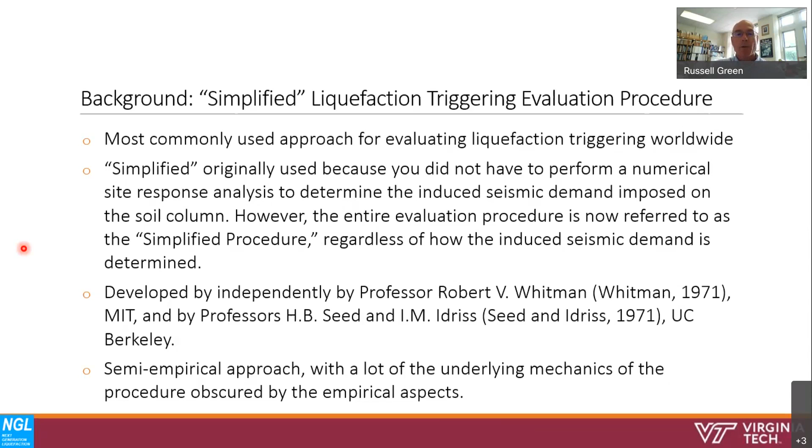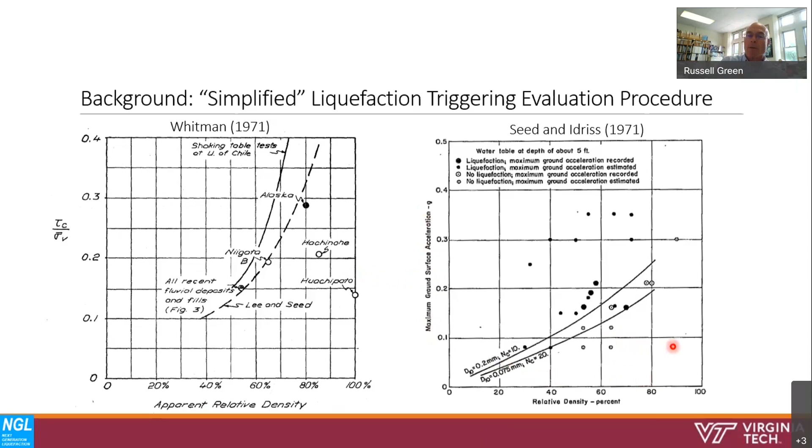All right, so back to the definition of simplified.

As opposed to performing numerical site response analyses, the estimated cyclic shear stress at depth in a profile was determined using Newton's second law, F equals ma. They assumed a rigid soil column, you knew the peak ground acceleration at the ground surface, and you were interested in computing the maximum shear stress at some depth z. Starting with Newton's second law and going through substitutions, you end up with the maximum shear stress at the base of this rigid column being equal to the total stress divided by the acceleration due to gravity times the peak horizontal ground acceleration at the ground surface.

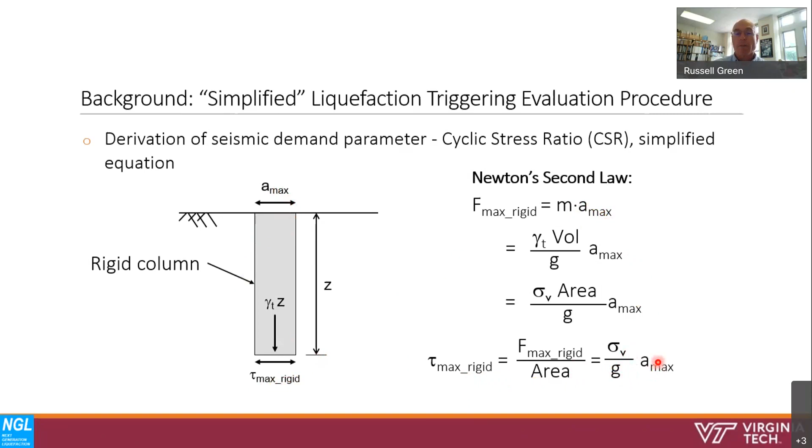The rigid soil column doesn't represent what we have in the field, so there needed to be a series of corrections and normalizations, and many of these evolved over time.

The resulting equation we use for our normalized cyclic stress ratio, designated as CSR star, is 0.65 times A max divided by G, times total stress divided by initial vertical effective stress, times R sub D, times 1 over the magnitude scaling factor, times K sigma, times K alpha.

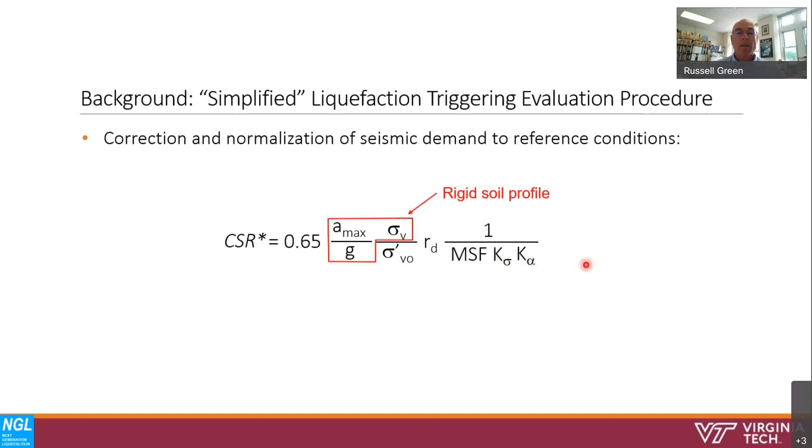If we go through specifically what these normalizations are, you can see the components for the rigid soil profile bound in red. Then the normalization for the fact that we don't have a rigid profile but a non-rigid profile introduced R sub D. We're doing this for a reference condition of a magnitude 7.5 event, which includes two components, the 0.65 and the magnitude scaling factor. You could argue the 0.65 doesn't deal with duration but with amplitude, but inherently they're linked, so I'll lump those together and say both were used to represent duration.

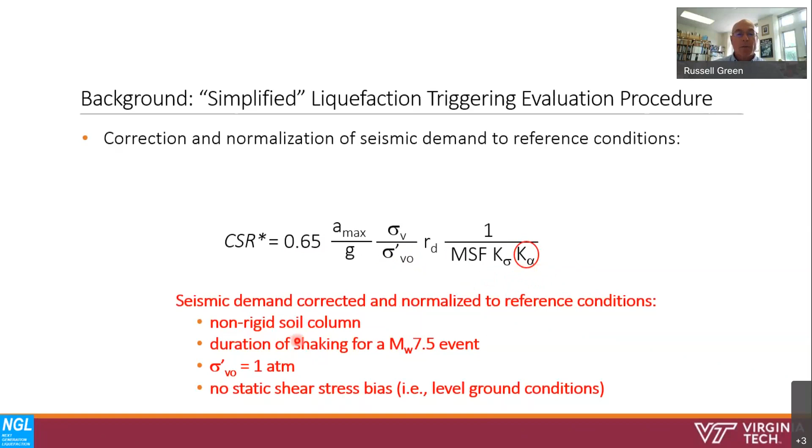Then we have dividing by the initial vertical effective stress and the introduction of K sigma to get it to 1 atmosphere overburden stress. And finally, no static shear stress or level ground conditions, the introduction of K alpha. So all of these conditions represent our reference conditions.

This cyclic resistance ratio curve, or normalized cyclic resistance ratio curve, corresponds to the reference conditions that we normalized our cyclic stress ratio to.

In a forward analysis, we compute the factor of safety against liquefaction with the traditional definition of factor of safety being capacity divided by demand, which for liquefaction is CRR star divided by CSR star. Our CRR star is determined by performing in situ tests at the site of interest. Our CSR star is determined from our design earthquake.

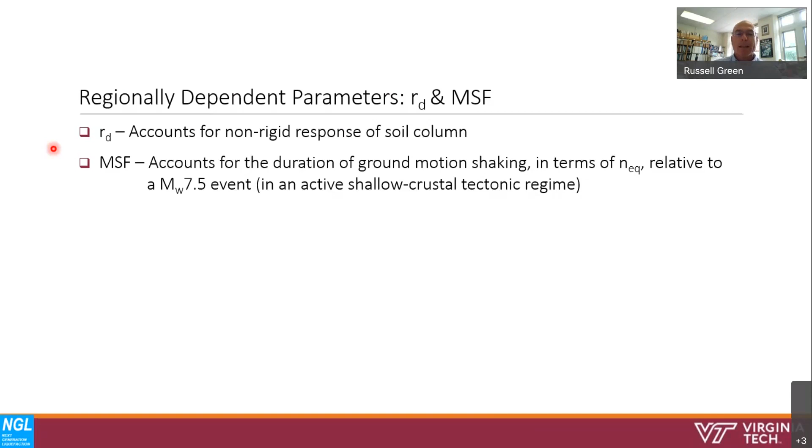This is relative to a magnitude 7.5 event, and again, in an active shallow crustal tectonic regime.

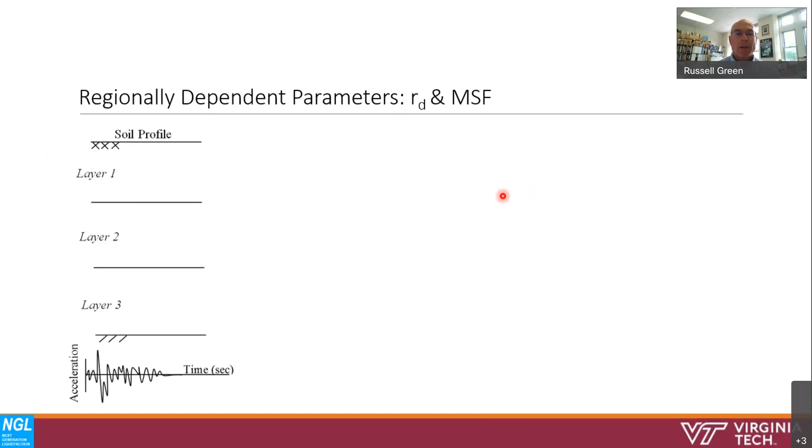So now looking at these parameters, R sub D and magnitude scaling factors, and how we develop those regionally, what we do is take soil profiles and ground motions, and select these for being representative of whatever region we're interested in. I'm doing these regions fairly crudely: Western US, Central Eastern US, Pacific Northwest for subduction zones, and then even within these different tectonic regimes, whether we're dealing with natural or induced seismicity.

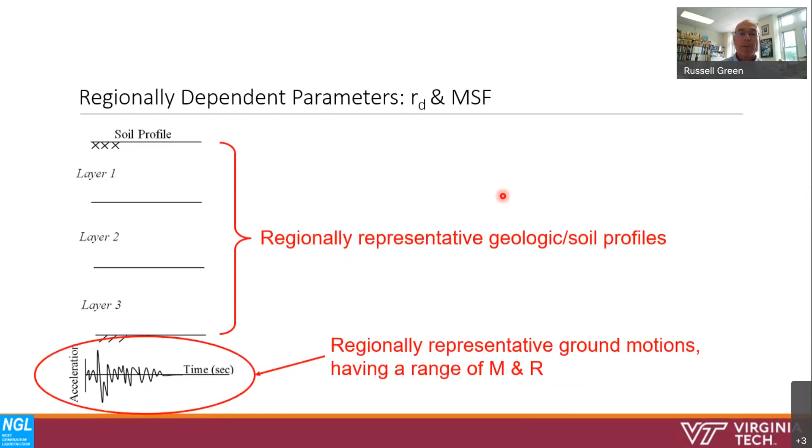Once we have our representative profiles and ground motions, we perform a series of site response analyses, and then we're able to get relationships for number of equivalent cycles, and also R sub D. These relationships are going to be region specific, and they're also going to be correlated if you're doing a probabilistic type analysis. So we'll have a distribution around each of these, but if you pick a low value here, it might mean you have to pick a high value there because they are correlated.

So back to what R sub D and magnitude scaling factor represent. When we're dealing with a region, it's going to be a function of the properties of the soil profile. Our profile stratigraphy is going to be a function of shear wave velocity and impedance contrast. The predictive parameters we've commonly used are VS12, our average shear wave velocity in the upper 12 meters of the profile. This was originally proposed by Cetin, and we've done subsequent analyses, and it actually works well in most of the regions we've looked at. There's also going to be regional dependencies.

We also have the stress strain response of the individual strata. I'm not sure if that's regional—probably geomorphology would be a more proper way of saying it's dependent, but potentially regionally dependent on a broader scale. Also depth of bedrock and the bedrock stiffness.

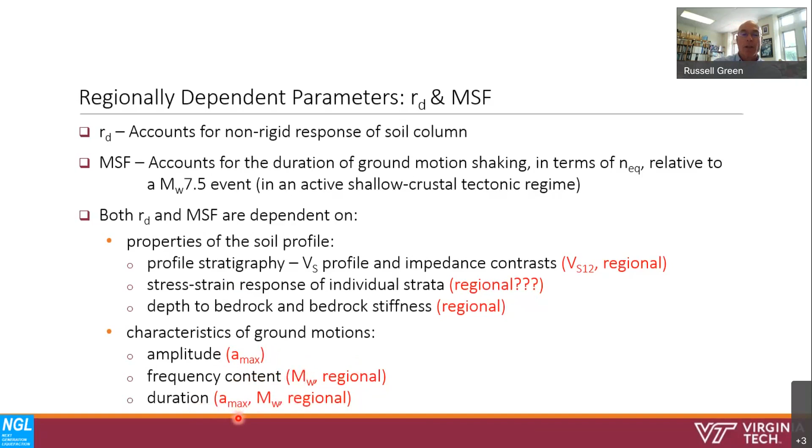And then the characteristics of the ground motions: the amplitude of the ground motions, which we typically represent by A max, our peak ground acceleration in the horizontal direction at the ground surface. Our frequency content, which we typically represent in terms of magnitude, but also regionally. And then duration, with peak ground acceleration, magnitude, and region. I'll specifically point out this peak ground acceleration because this hasn't traditionally been included as a duration predictive measure.

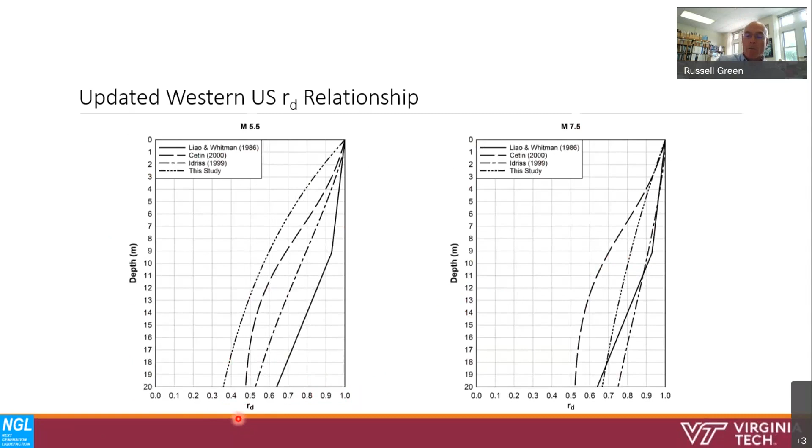So looking at updated R sub D relationships for the Western US, and the Western US is going to be our reference condition. When I refer to the Western US, I'm referring to an active shallow crustal tectonic regime.

So I have two plots. One on the left has depth on the vertical axis and R sub D on the horizontal axis, and this corresponds to a magnitude 5.5, and I'm showing 4 different curves. Three of the curves that fall to the right are ones that have been previously used, and the one we developed is the one that falls most to the left.

Then a similar plot, only now for a magnitude 7.5, and you can see these curves kind of bunch together a little bit closer. So you can see for lower magnitudes is where we would get a bigger discrepancy using existing R sub D relationships versus the newly proposed one.

Number of equivalent cycles is used to represent the duration. We performed a series of numerical site response analyses, computed the duration for different ground motions at different depths, and then looked at different predictive measures or parameters to quantify this number of equivalent cycles. We ended up finding out that it's related to Amax, the peak ground acceleration at the ground surface, and also the magnitude.

The introduction of Amax, I actually resisted for a while, and in retrospect I shouldn't have. The reason is if you think of near field motions, particularly considering directivity. If we have a given magnitude event and a given site to source distance, let's define site to source distance as distance to the fault.

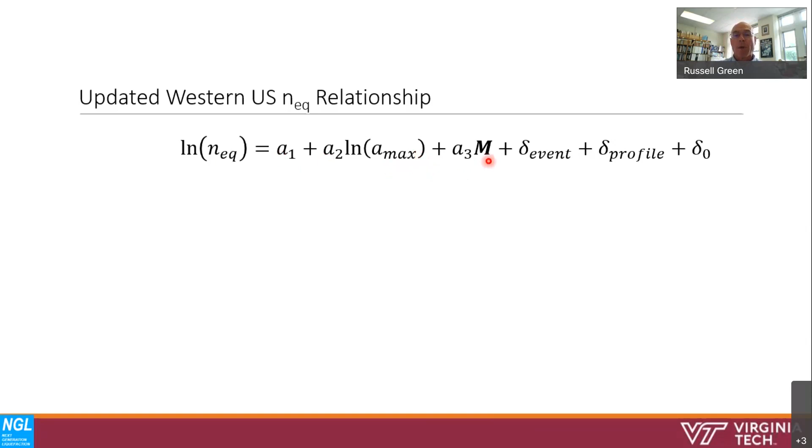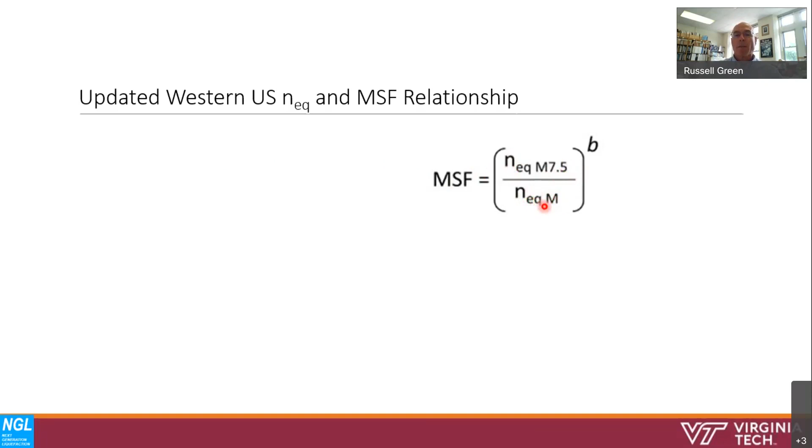The way we relate this to magnitude scaling factor is we have number of equivalent cycles for our reference condition, which is a 7.5 event in the Western US. The denominator is number of equivalent cycles for a given magnitude, which could be regionally dependent. This is raised to a power of B.

The B value is typically taken from laboratory tests. What we do is plot the stress ratio on a log scale versus number of cycles to liquefaction. This often plots as a straight line, and B is the negative slope of that line.

But in looking at that, we ended up finding out, and this was Kristen's work, that the B value can actually vary depending on how you define liquefaction. For loose samples, we typically use an excess pore water pressure ratio of 1. For denser samples, that doesn't hold, so we end up using some sort of strain criteria. Depending on what strain criteria you use can influence the B value, particularly when dealing with a low number of cycles to liquefy.

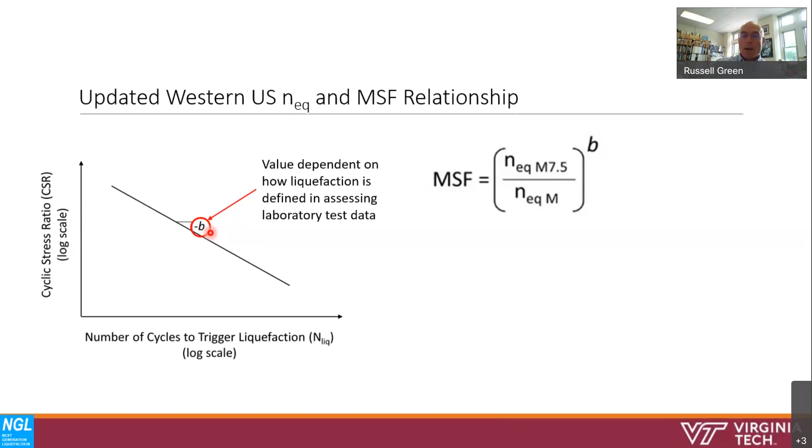We end up finding out a better way of doing this is plotting cyclic stress ratio versus number of cycles to liquefaction, but doing a contour of constant dissipated energy. This is consistent because the way we compute number of equivalent cycles uses fatigue theory, which is actually based on dissipated energy, whether it's embedded in it or upfront, depending on how you implement it. Using a contour of constant dissipated energy, we find that this B value is fairly constant at around 0.28.

Another thing is that it allows you to determine this contour and the slope for modulus reduction curves that are typically used in equivalent linear site response analyses. The benefit is those modulus reduction curves are often based on a large statistical analysis of a large database of different types of soils.

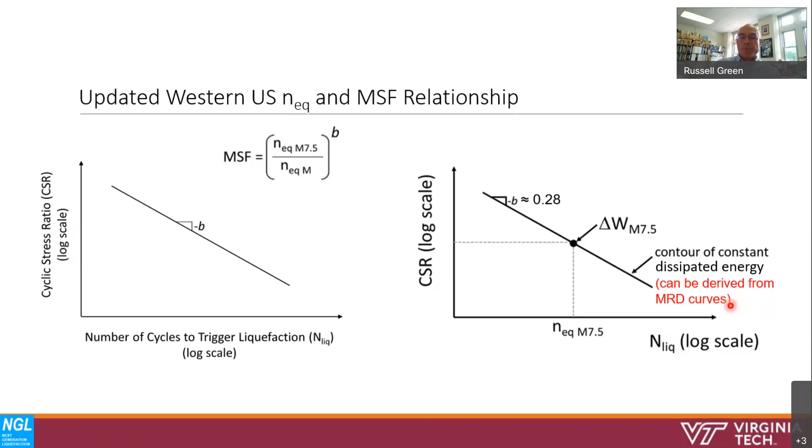Now going into the magnitude scaling factor, for a magnitude 7.5 event, that's only one of our predictive variables. We also have to have a reference condition for Amax. So what I did is look at the case history databases for liquefaction and no liquefaction cases ranging between magnitude 7.4 and 7.6, and averaged out the PGA, ending up with a PGA of 0.35 G. So our reference condition for that CRR curve is a magnitude 7.5 event with a PGA of 0.35 G, in an active shallow crustal tectonic regime.

Our denominator in this relationship is going to be a regionally dependent relationship, depending on what region your case histories are from.

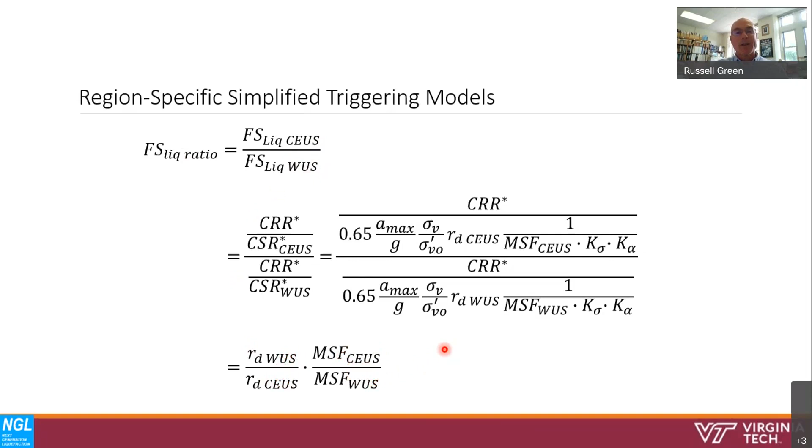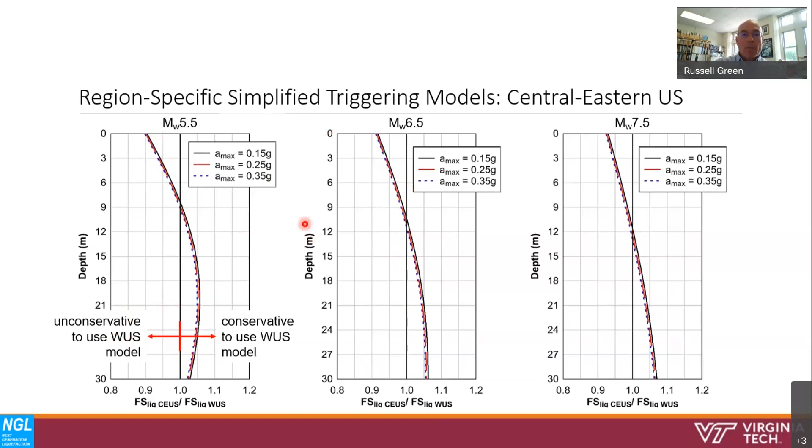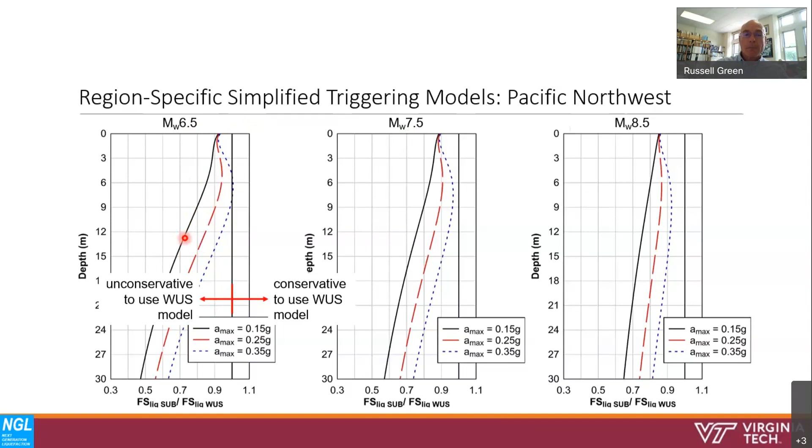And my slides are not advancing.

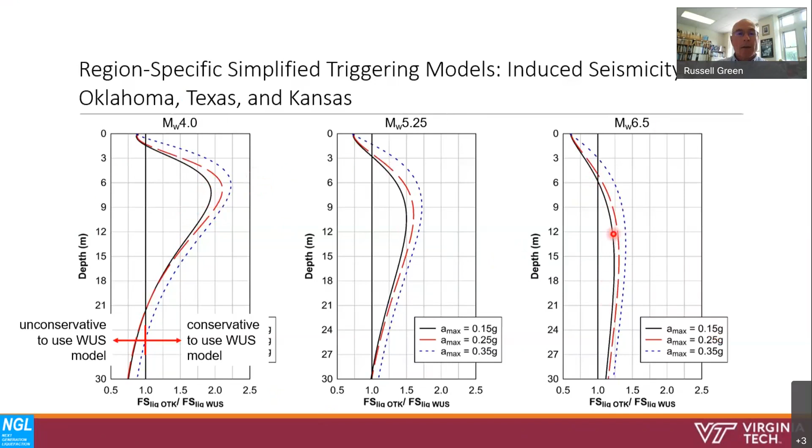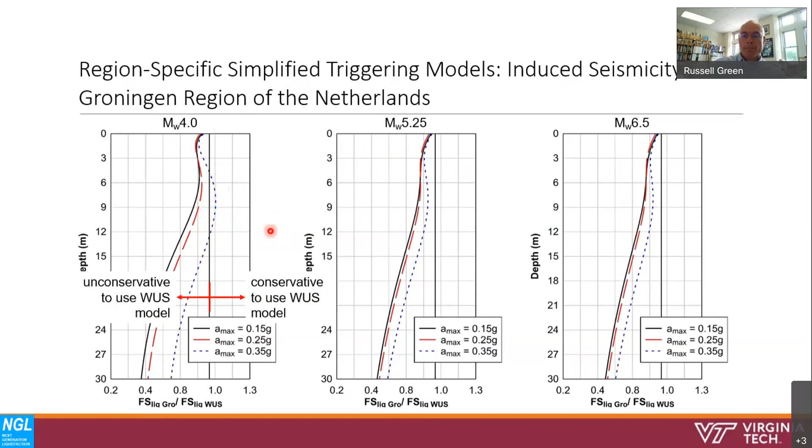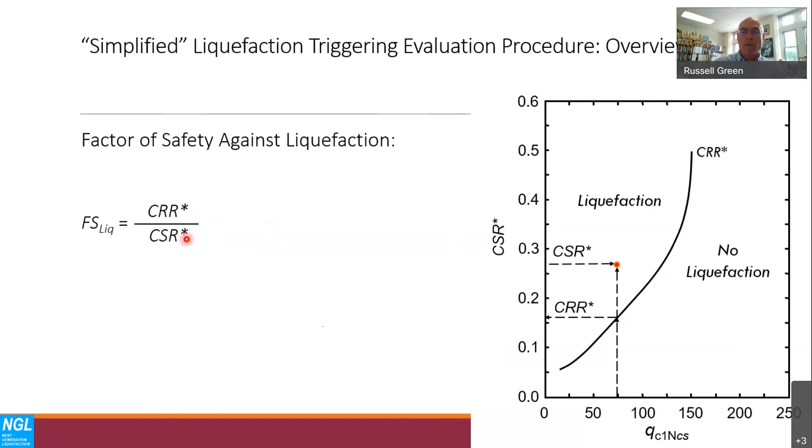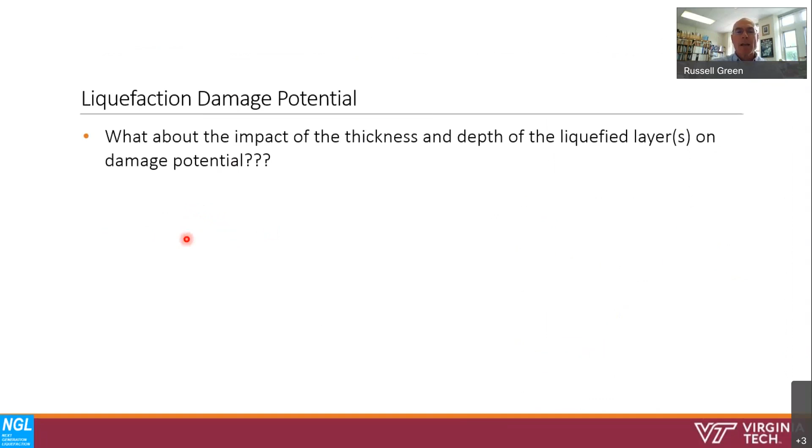All right, back to the simplified curve. Again, the factor of safety is the CRR divided by the CSR, where both are normalized for our reference conditions. The question then is, if we're interested in the damage potential for liquefaction, what is the impact of the thickness and depth of the liquefied layer on that damage potential? So it's not just about getting a factor of safety and determining whether a site needs remediation based solely on that, but trying to predict what the actual damage potential will be.

The liquefaction potential index was developed by Iwasaki et al. in 1978, and I'm going to categorize this as a manifestation severity index model. What Iwasaki proposed is that you perform your in situ test, use the simplified triggering curve to compute your factor of safety, then take a weighted average of the factor of safety and integrate it over depth, to a maximum depth of 20 meters, and come up with an index value, in this case your LPI value, which you then correlate to the expected damage.

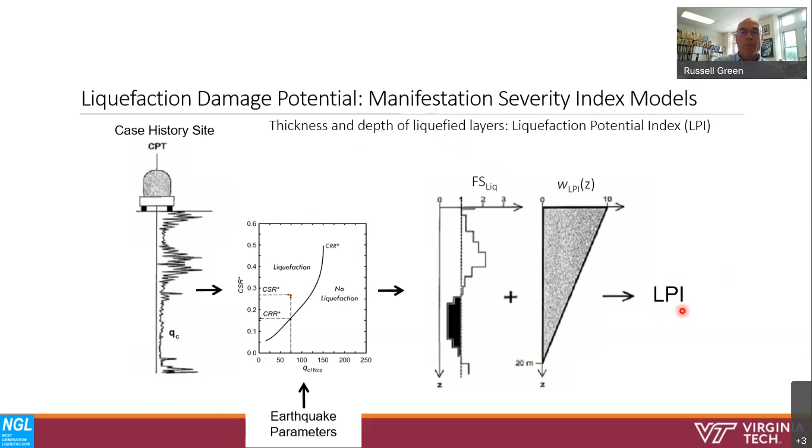Mathematically, that is shown here. You have the LPI, which you're integrating over your depth of 0 to 20 meters. You have your depth weighting factor, and then you also have your weighting factor based on the factor of safety. The limits for this are: an LPI of 0 would be the lowest value, and the maximum value you could get is an LPI of 100.

Based on some case histories from Japan, Iwasaki et al. found that if LPI is less than 5, severe liquefaction manifestations are not expected. And if LPI is greater than 15, severe manifestations are expected.

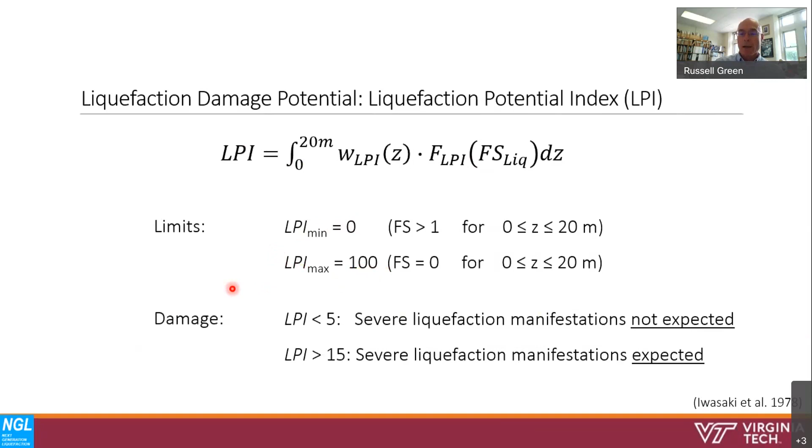The question is, although what we do now takes into account the factor of safety, the thickness, and the depth of these layers, there are other influencing factors on the damage potential, specifically the influence of the non-liquefied crust, and also the dilative tendencies of the soil at moderate to larger strains.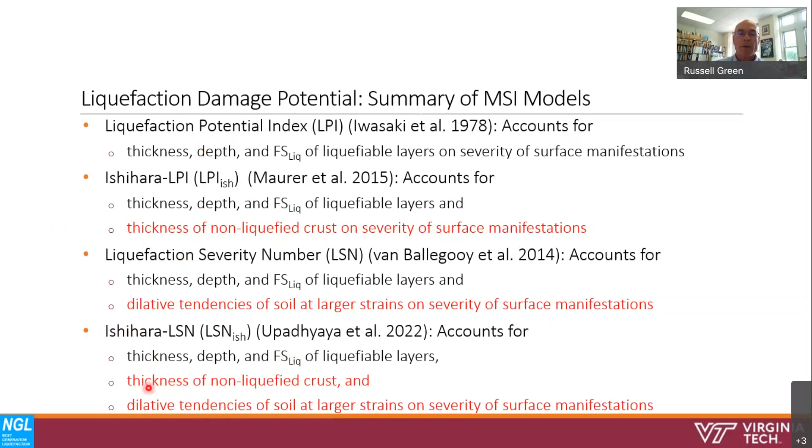We're not going to have any interbedded non-liquefied layers in these profiles. Most of those, which is also of interest and have been studied, fall in western Christchurch. So in total, what we had was just over 7,000 case histories. We also excluded any case histories where lateral spreading was a predominant manifestation.

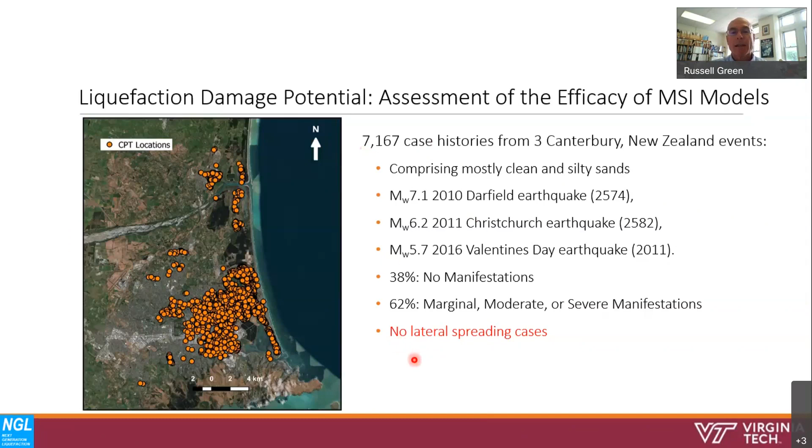So now what we did was use those four different manifestation indices models in this database and assessed how well they predicted severity of liquefaction. And what we ended up finding is that the two MSI models that account for the dilative tendencies of the soil ended up performing worse than the two models that didn't.

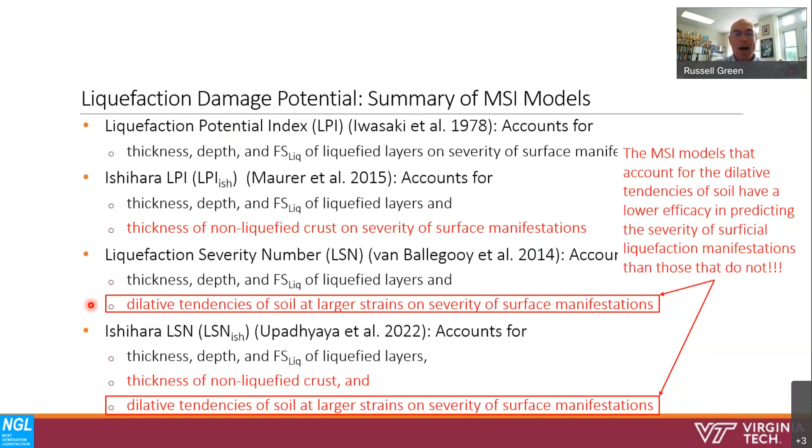So the original LPI model and the LPI-ish model performed better than the LSN and the LSN-ish model. It isn't that the LSN and LSN-ish performed badly, it's just that the LPI and LPI-ish performed better. The question becomes, why is that the case? Because we know that the dilative tendency of the soil directly influences the damage potential.

So now it's a matter of looking back and determining why we see the trends that we see. And what we end up figuring out is that we're double counting the influence of this dilative tendency at larger strains on the severity of surface manifestations. The reason for this relates back to how we developed our triggering curve.

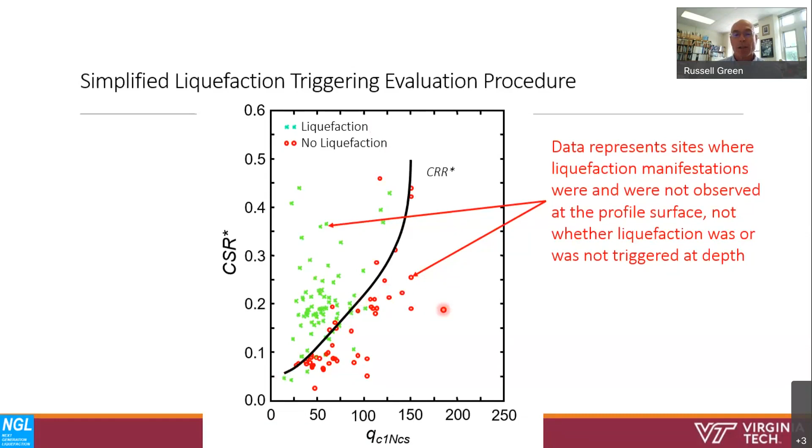So taking a curve that's now being influenced by this dilative tendency and then throwing on an MSI model that also takes in the dilative tendencies now double counts that dilative tendency behavior. So the motivation now is to try to separate triggering from manifestation, to properly ensure we can refine each component of this model for better prediction of damage potential from liquefaction.

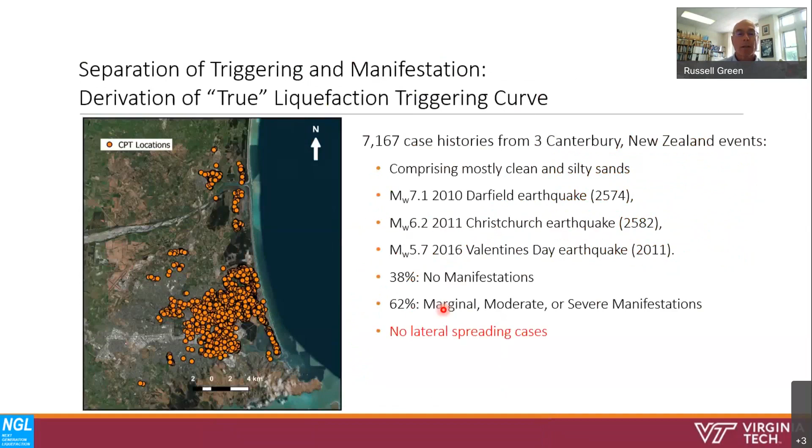So we went back to the same 7,000-some case histories, all from the Canterbury region of New Zealand, and we're trying now to separate the manifestation from triggering. We're defining this as the true triggering curve - not necessarily that it's 100% correct, but it's trying to remove the influence of the manifestation.

So all the sites we looked at were characterized by CPT. Now we need a triggering model, but again, what we want to do is use a true triggering model that's absent of any manifestation factors. So now we're just going to assume a shape for this triggering curve, then compute the factor of safety.

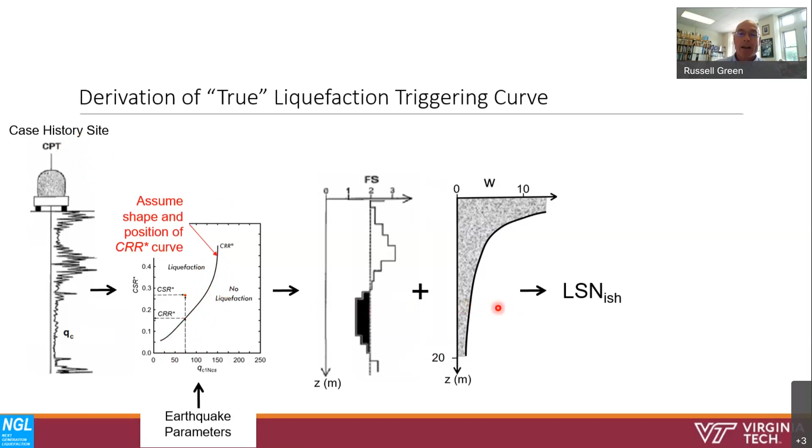We're going to apply the LSN framework because that accounts for the majority of the predominant manifestation factors we think influence manifestation. We'll do this for all 7,000 cases, comparing predicted to observed surface manifestations. Then we go back and revise the position of the curve, repeating this process multiple times until we get a triggering curve that gives our best predictions - the best comparison between predicted and observed severity of surface manifestations.

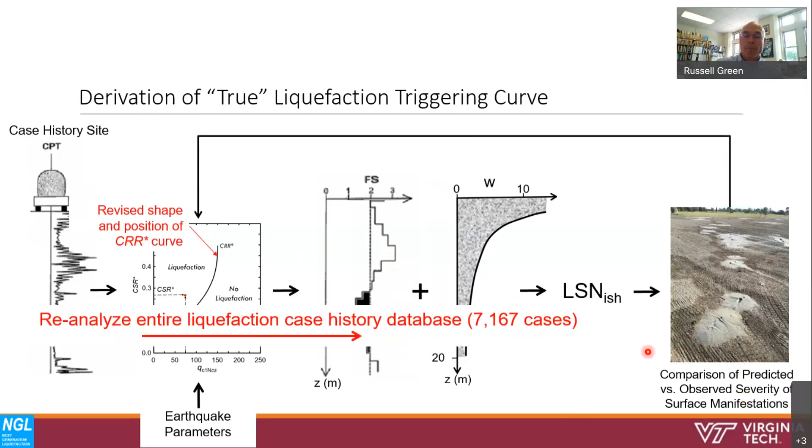So we did this, and this was our triggering curve. Now, the data - even though we had 7,000-some case histories to derive this curve - realize and compare that to the 13 originally used by Whitman and the 35 originally used by Seed and Idriss. So we have 7,000, but it's only from one region of the world and only from three earthquakes that impacted that one region. As a result, that data isn't able to fully constrain this true triggering curve.

And so we had to use some assumptions on the shape of it, but we ended up thinking that it's going to be a straight line, and we performed it probabilistically. So I'm showing the median probability of liquefaction of 85% and 15%.

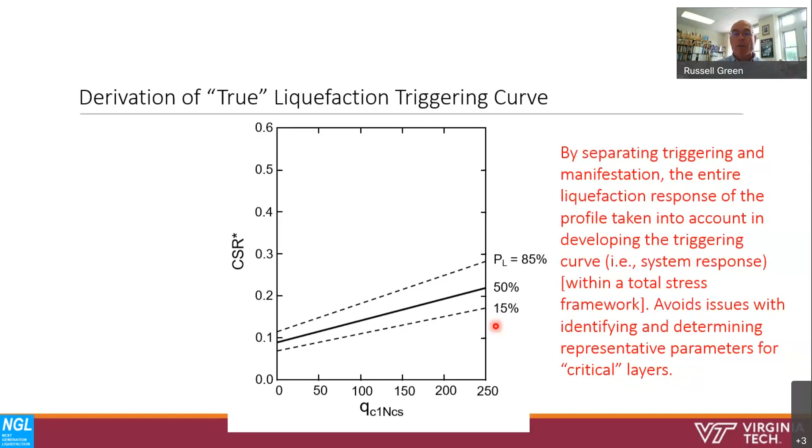The benefit of doing this—and there are multiple benefits—is we remove the subjectivity of figuring out what our critical layer is. For those who have developed triggering curves before, when you analyze case histories, you have to figure out what you think is the critical layer, including its thickness and representative properties. Because we're integrating through the manifestation model over the entire depth, or at least down to 20 meters, there is no single critical layer. Within a total stress framework, all the layers potentially influence the surface manifestations, so this avoids some of the subjectivity in selecting the critical layer.

So then we compared that to high quality direct cyclic simple shear tests—this was largely done by Kristen. I'm showing 4 points here, but that doesn't mean we only had 4 points. Each point is derived from a curve developed from at least 10 or so tests, where we plot cyclic stress ratio versus number of cycles to liquefy, and pull off the point corresponding to a magnitude 7.5 event, which we're saying is 15 cycles. So each of these points represents at least 10 tests.

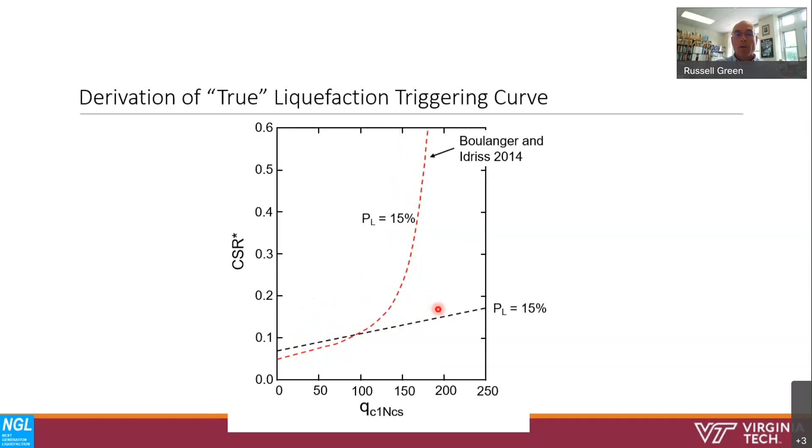If we now compare it to the Boulanger and Idriss 2014 curve, at lower penetration resistances there's not a big difference. It's not until we get into denser soils that we see the difference. That's exactly what we expected, because at denser soils you'd have a dilative tendency that could prevent manifestations from occurring. So comparing the deterministic or probabilistic curve to the probability of liquefaction at 15%, the difference—going from a linear line to a curved line—is because these dilative tendencies inhibit surface manifestations.

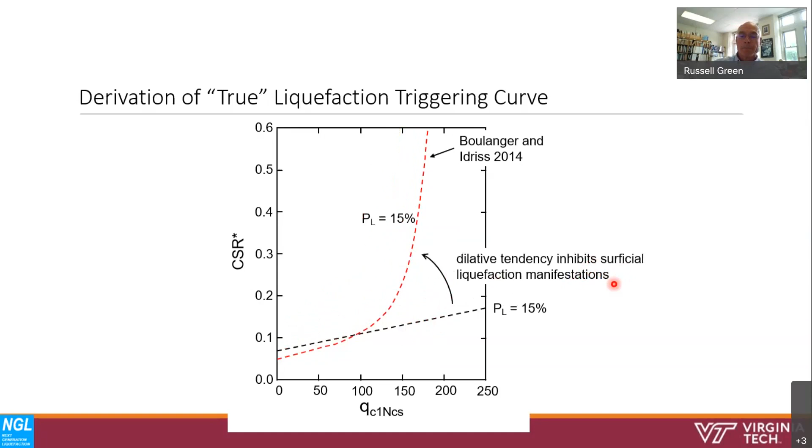Then, to put it into a full probabilistic or performance-based design, we're proposing a probability of surface manifestations given a certain LSN value versus LSN value. This allows you to use your deterministic curve, compute the factor of safety, run it through the LSN framework, compute your LSN, and this gives you the probability of surface manifestations for that LSN.

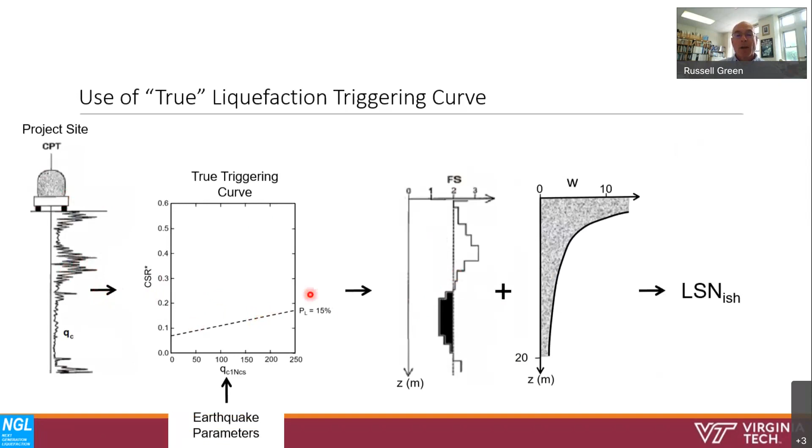So how we would use this in a forward analysis: for your project site, you would perform your in situ test—in this case, I'm showing CPT. You would then use your true triggering curve to compute your factor of safety against liquefaction, and run this through the LSN framework to compute an LSN.

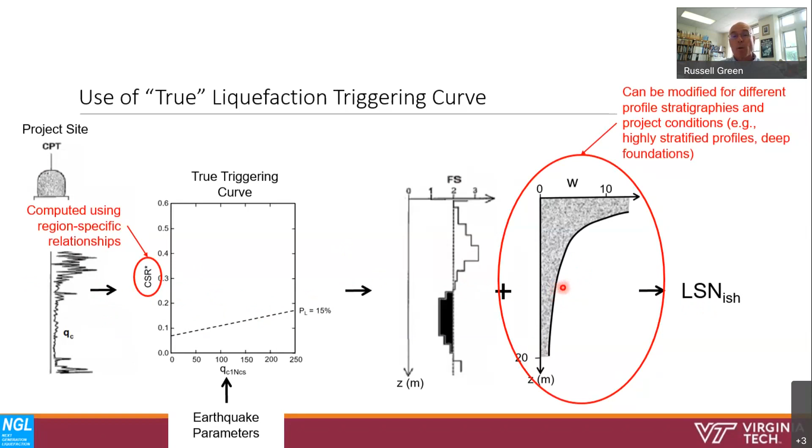In implementing this, you would use a region-specific value for your CSR, and you could also potentially modify the depth weighting factor to account for things like interbedded layers. This would be developed from future work—not anything we have now, but work that is ongoing. Then, if you wanted to do the full probabilistic analysis, you would use this curve for your LSN value, which gives you the probability of surface manifestations given that LSN value.

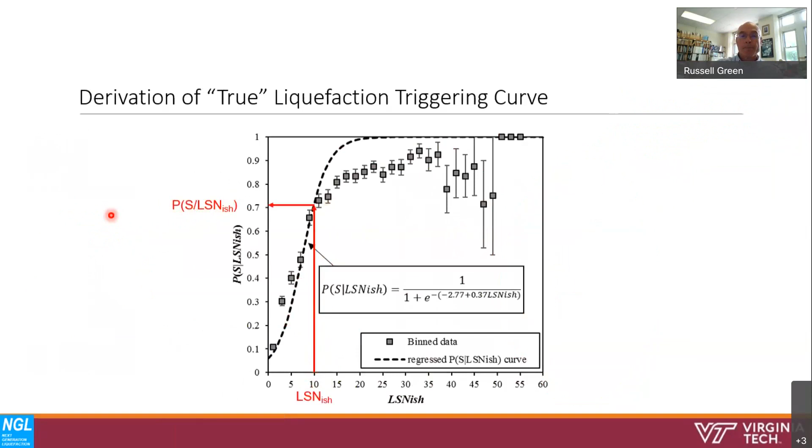In summary, the simplified triggering models are for a set of reference conditions. Regional relationships are needed to account for differences in soil profiles and ground motion characteristics relative to the reference conditions. Traditionally derived triggering curves inherently include effects of both triggering and manifestations. In conjunction with the new manifestation model, an iterative approach was used for proposing a true triggering curve—true meaning absent of factors influencing surface manifestations, or at least a first attempt at doing that.

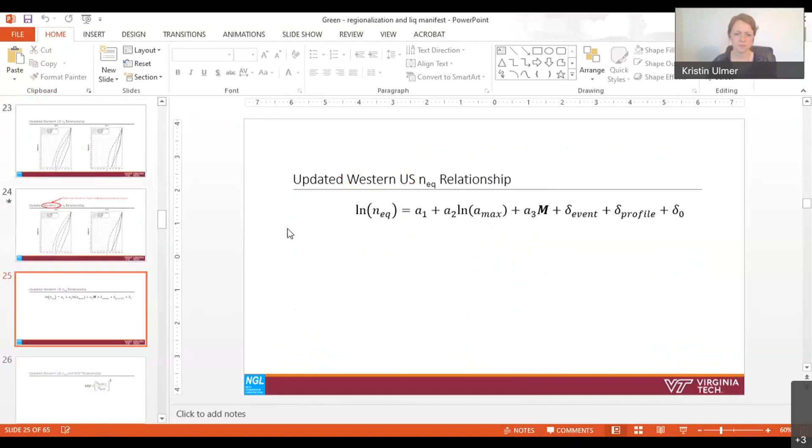Thanks a lot for coming to the presentation. I had a question just about the difference between the true triggering curve and the original triggering curves at high relative density, because there's now a significant difference where your method correctly points out that these relative densities higher than 80% or something can liquefy. We know that from lab tests, but a lot of people don't worry about those because they plot beneath the red lines here. So have you had cases where engineers may be working on pile foundations that are founded in a dense layer, and now they have to worry about liquefaction at the tips of those piles, whereas before they might not have had to worry about it, even though the layer might not manifest all the way to the surface, right? Doing an LSN or something, it still may liquefy and lose capacity at the tip of a pile or something like that. That's right.

So no, we haven't had that case because we haven't published this yet. So I'm working on the draft manuscript now. We published different pieces of what I presented, but we haven't tried to publish the true triggering curve. But you're exactly right, and that goes back to this right here. I had explicitly pointed out, if you have these interbedded layers, non-liquefied layers, that you might want a different depth weighting factor that accounts for those. But this framework, what I'm showing here, corresponds to just surface manifestations. If you have deep foundation systems, this also would be a different weighting factor, so everything up to this weighting factor would be different. And you're exactly right, we might be unconservatively evaluating piles because this material may liquefy at depth that might not manifest in a free field at the ground surface, but might end up causing damage to the pile foundation system.

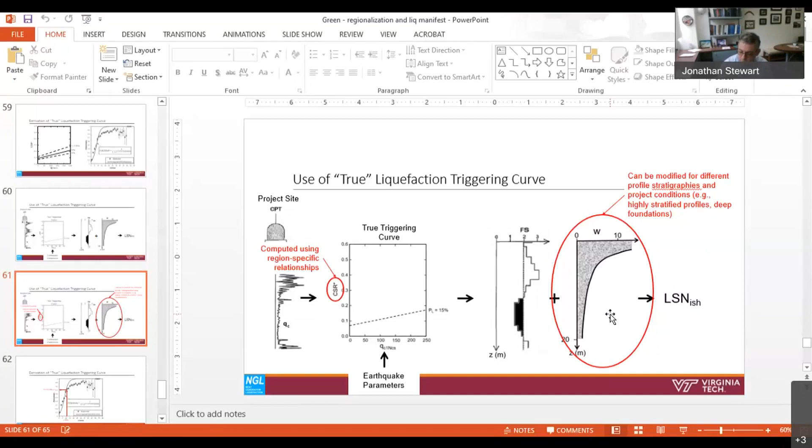My question for you is about the other part of your presentation on regionalization. It seems to me that regionalization, in this context of factors of safety and so on, is really an outcome of the fact that ground motions and soil profiles are regional, including frequency content, which is part of ground motions. So if you had a liquefaction model directly using the appropriate ground motion intensity measures, and an R sub D type model appropriately using attributes of the VS profile, then you would just put those in for your site, whatever region it's in, and things wouldn't be regional anymore.

Do you agree with that? Yeah, you would be mapping it back to your reference conditions. Exactly right. So your triggering curve is your triggering curve, regardless of whether you use a true triggering curve or the existing triggering curves. You're taking your site and mapping it back into the reference space. Okay, yeah, I just wanted to make sure I understood your argument.

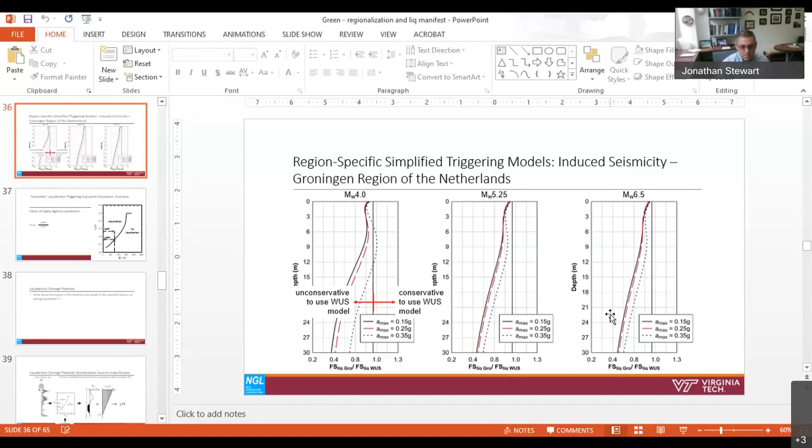I think the one exception to that would be that one could imagine the mineralogy or geologic conditions at deposition might be systematically different in one region versus another. To use an extreme case, suppose we took Hawaii, which has a very different type of mineralogy. Then you're talking about the material behavior itself being different, which is a separate thing from the ground motion characteristics.

It is, and one of the things I removed from the presentation I gave in Charlotte, although even there it wasn't emphasized heavily, is the K sigma factor. We're proposing a new K gamma factor, which actually incorporates a lot of the intrinsic soil properties and also the stress states.

I actually proposed presenting on that, but Kristin preferred this, which is absolutely fine. But there is that factor, replacing K sigma with K gamma, that does take into account intrinsic soil properties, at least to a certain extent, that may help with some of that. I don't know if it would necessarily help with volcanic or calcareous materials, but it certainly would help with aged materials.

Yeah, but I think the framework whereby you have a liquefaction triggering curve, and then do the manifestation separately, the triggering curve could be mineralogically varying. It would take us a while to work all that out as a profession, but one could imagine a future where we have different curves for different depositional environments, different minerals.

So just to elaborate on the K gamma factor, if you look at the original work by Dobry, but also Martin, Finn and Seed and others at British Columbia, they show that if you use strain independent of soil mineralogy, aging, and even stress conditions, the correlation between number of equivalent cycles of strain and excess pore water pressure is fairly constant. So what the K gamma factor does, and the reason it's called gamma is because it relates to shear strain, is equate shear strains for the different minerals.

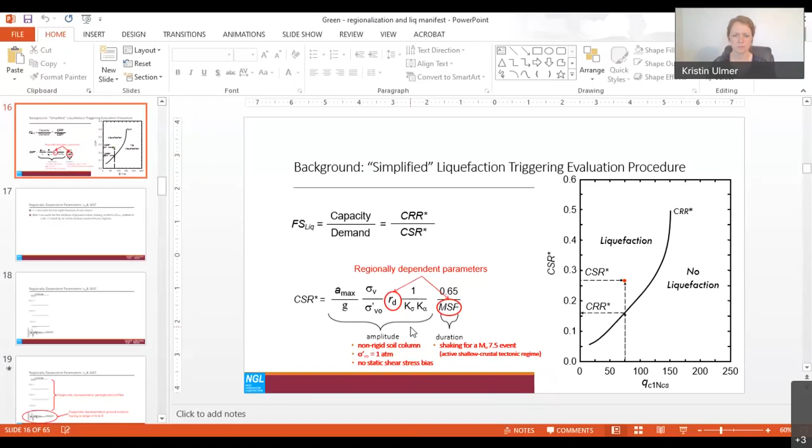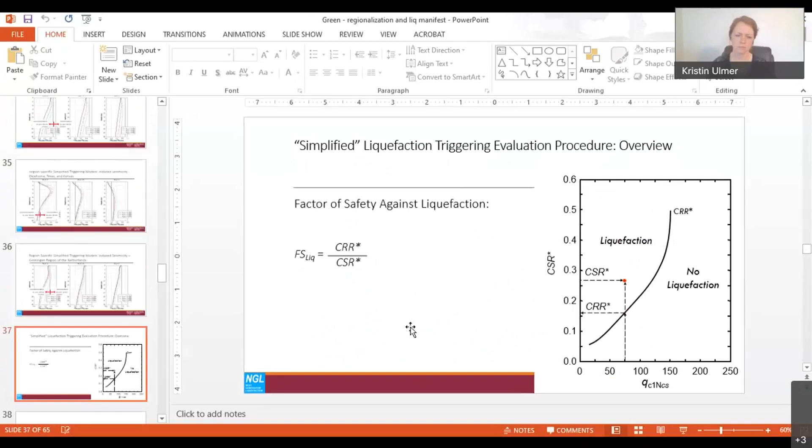Hey Russell, thank you for your clarifications and for the seminar, truly valuable work, and thank you for sharing it with us. Another question that came up, just for my own clarification: if the definition of triggering in the true triggering curves is related to manifestation, as you explained, how can we distinguish between the two? Wouldn't it be more reasonable to relate triggering to fundamental soil response, like pore pressure and shear strain from effective stress analyses of the profiles, and then compare them with manifestation to truly keep them separate?

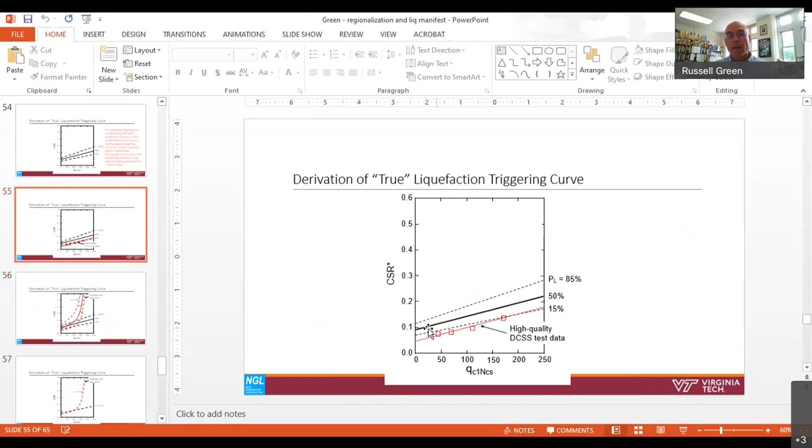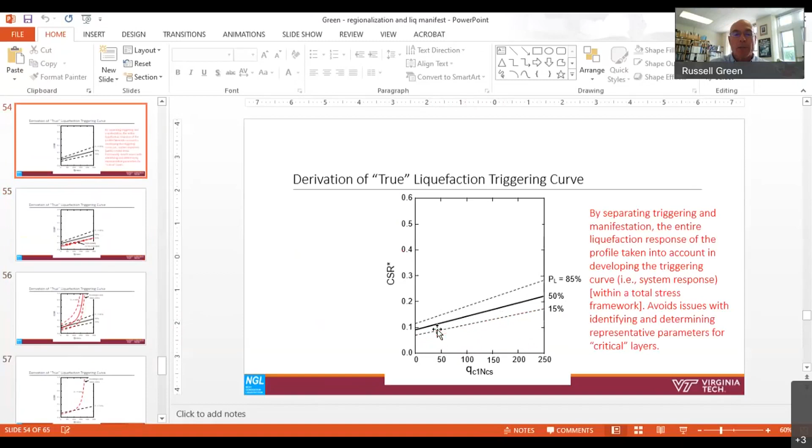I don't disagree with you. As I had mentioned, when we did this iterative approach to developing the true triggering curve, we ended up having to go back to laboratory tests to help guide us on the shape that we picked. This is where your judgment comes in, and we were using laboratory tests in helping limit this functional form. So you can imagine, when doing this iterative procedure of assuming a shape and revising it, you have an infinite number of not only functional forms, but also the regression coefficients for those different functional forms.

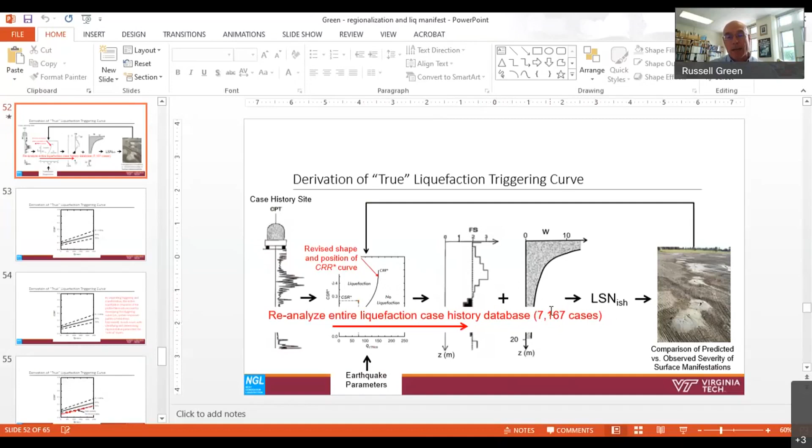Even though we have over 7,000 cases, it's still not enough to fully constrain this for just any type of random curve. So what you're proposing is that your judgment can be input into that triggering, basing it on laboratory tests where you know what's triggering because you're defining it in a certain way in the laboratory. And we actually did do that. It isn't necessarily that everybody will agree with the judgment we used, but we are guided by that in selecting the functional form for this triggering curve. So yes, I agree with you, and I think that's essentially where that input goes. If you get that right, and your LSN model is correct - which may need some potential revisions - then it should actually result in something that truly represents triggering.

Okay, great. Thank you. I'm looking for any other questions. I don't see... oh, I see Steve, your hand is raised. Go for it.

Hi Russell, thanks also for your presentation. It's really very interesting. I'm wondering if you have applied this to any other data sets besides Christchurch, and whether you've seen variations in what you would get if you did that.

We did. In the paper I talked about, which we're currently working on and is 95% done - so when I say I'm working on it, it's not that I have all the ideas in my head and just haven't written it, it's 95+% written - what we did was a validation exercise where we took 50 worldwide case histories and evaluated those. We used the LSN model, but computed the factor of safety one way using this triggering curve, the true triggering curve, and then the Boulanger and Idriss 2014 triggering curve. Then we compared how successful we were in predicting manifestations or no manifestations. We got about the same predictions with the true triggering curve versus Boulanger and Idriss.

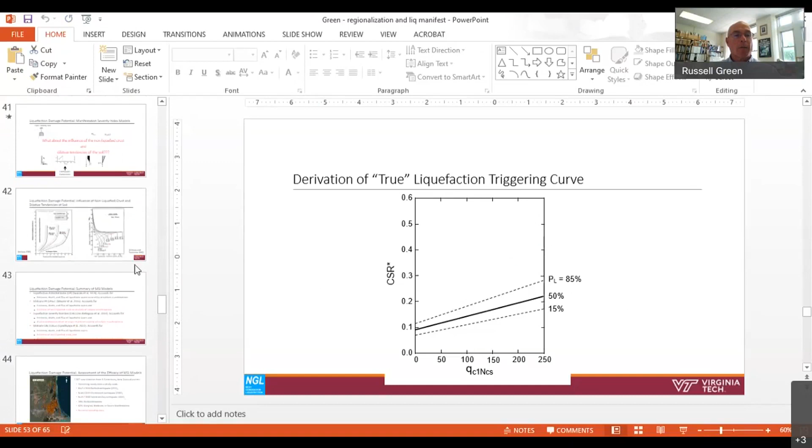If no one has a question, I'll tell you what Ross posed to me. He said that he worked on a project where he convinced the people that they needed to perform soil improvement, and they were using penetration resistance to evaluate their quality assurance to ensure that they improve the soil. And he's saying it's going to be tough now to tell them after all the time and money they spent that they're still going to liquefy.

It's a matter of now going to performance-based design type criteria where, yes, it may liquefy even though it's 90% relative density. The effort and money that you put in to densify the soil is to reduce the consequences, not whether it will trigger or not. And so it really takes the heart of this curve where you're showing you can actually liquefy dense soils. It's just you're going to have minimal consequences if they do liquefy. That may not sit well with a lot of regulators or practitioners based on what we've done in the past, but I think it's technically and mechanically sound.

Thank you very much for adding that in there. I don't see any other questions or follow-up here. Oh, I see - sorry, one last one from today says, I'm a bit worried about judging damage based on volumetric strain without considering shear strain. Any comments on that?

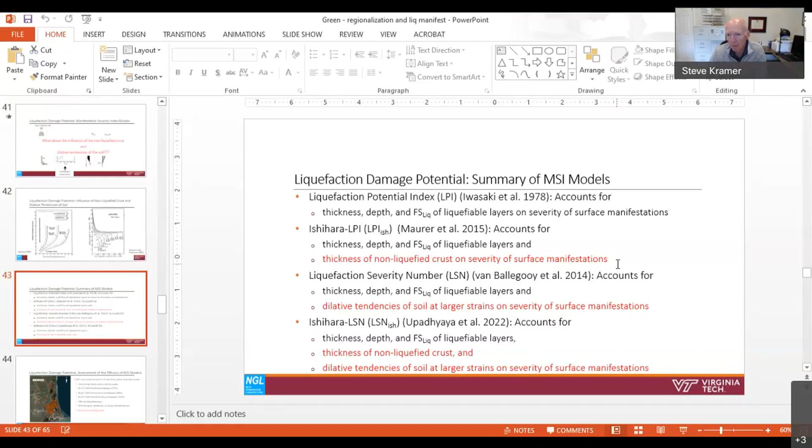Yeah, I agree they're correlated. I think the idea of a maximum volumetric strain makes a lot more sense to me than a maximum shear strain. Again, the volumetric strain is just being used as an index for the dilative tendencies. And if we use shear strain, we would do the same thing. I'm not trying to predict the maximum shear strain. I'm just using it as an index for the dilative tendencies and relating that to the damage potential. Yeah, okay.